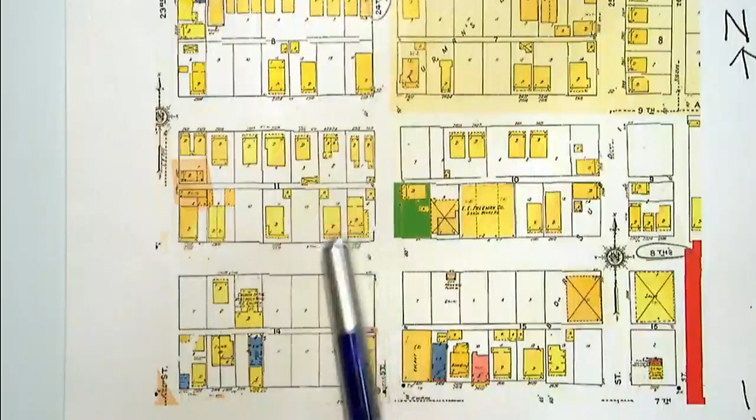Currently on site, through urban renewal and other challenges, structures have been removed. So currently to the east, you have empty parcels. Then you come to a grouping of contributing structures that I'll show you photos of. And as you head west across 24th, you have two historic structures there that we'll use for reference for setbacks and elevation from grade.

This is an aerial view so you get an understanding of the lay of the land as well. Once again, 8th Avenue, 24th Street, does have the alley that runs east-west behind it.

There are no trees in question. You see a canopy here, but Natural Resources has already reviewed this site and they have no concerns of the site plan as presented.

8th Avenue in the background, 24th Street here, looking back into the property. As I turn around on 24th, you have this period contributing structure that has a wraparound porch.

Now looking at the site from 8th Avenue, this is looking to the north. This is the subject site, 24th Street.

As you turn around, this is new construction that was reviewed and approved by this board, but has a different zoning classification. This allows for more of an industrial flavor, where the zoning classification that is in front of you today is a YC2, which is more of a traditional single-family structure.

As you work your way down 8th Avenue to the east, this is an abutting empty parcel.

This is looking down 24th to the north. Subject site is here.

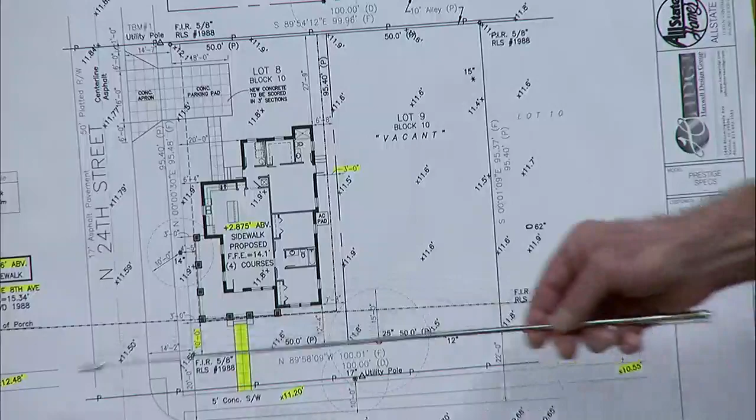It is 2.89 feet above the elevation of the sidewalk. On the other side, that sidewalk is at 12.48. Elevation is setting at 15.34, so we're 2.86 difference. We are exactly in the middle as far as the average. Sidewalk, finished floor elevation, we're 2.875 above that, so we're exactly on it.

Showing the setback, this is the front porch of the house to the east, front porch of the house to the west, showing the line. Our front porch lines up exactly, and we're, believe it or not, exactly 10 feet, which meets the setback. So it lines up great.

As far as our side setback, we're at 3 feet. We're honoring that. We're showing here the scored sidewalk from the existing sidewalk, same in the rear. We have all that. I think that pretty well covers the site plan.

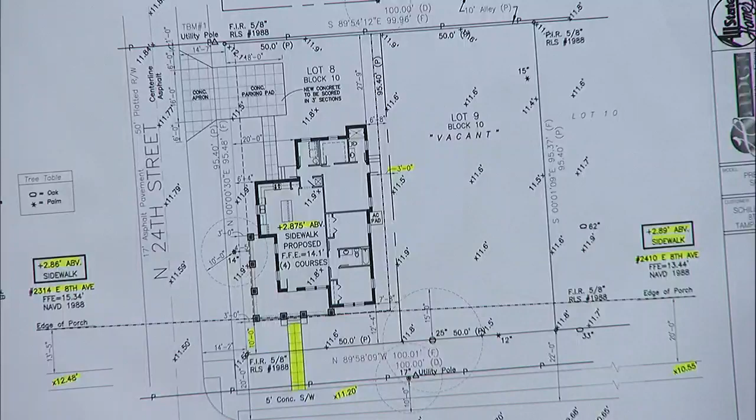Do you want to show this diagram?

May I hold on to it? I can't see it. You can speak from over here. We can see it on our monitors, so please. See it? We can see the diagram on our monitors.

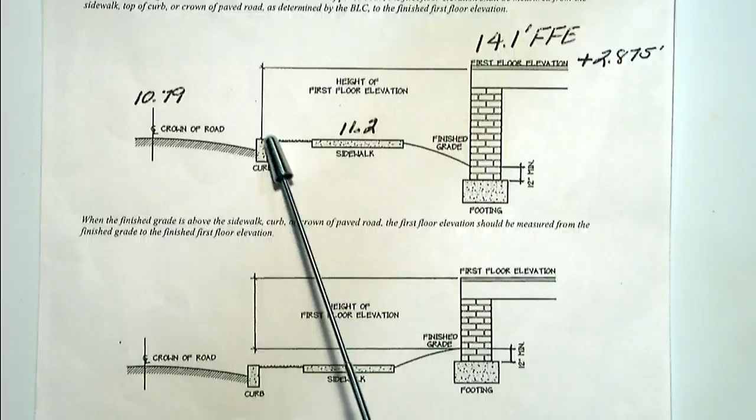Okay, all right, well, you're seeing the crown of the road, and I kind of covered these points a while ago, talking about the sidewalk, but crown of the road, sidewalk in front of our structure, proposed FFE, and then the difference, the 2.875 that I mentioned a few minutes ago.

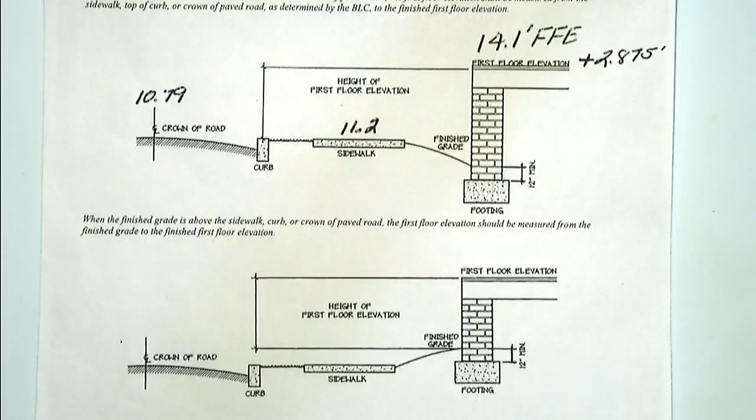So we want to talk about the house that we used as our inspiration. This is 9th and 24th on the corner. It's going to be the block north. You can see that it's stucco construction, with 3 risers as far as the elevation off the ground, gable venting. So we use that as our pattern. This is a closer look at the pattern of the stucco, and I zoomed in even closer to where you can see that pattern. Our proposed pattern is almost identical.

On the conditions, there is a point asked about fencing. There will be no fencing at this time. I showed earlier the scoring of the concrete to reflect the historic pattern, and I think I'll cover the window trim and that material when we look at our wall section.

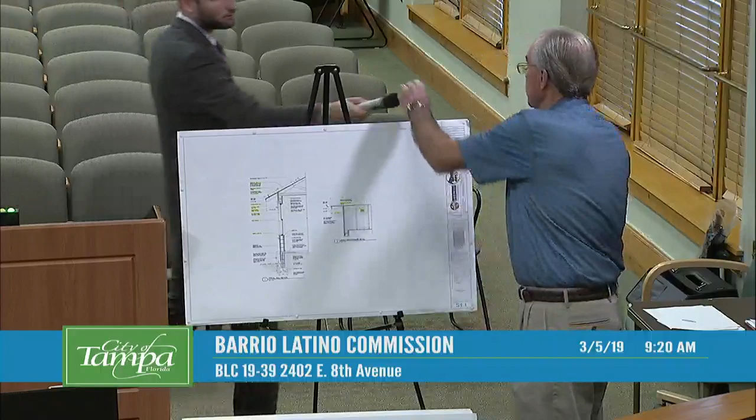We're going to have a 30-year dimensional shingle. And as far as the exposed rafter tails...

Hang on for a second, please. We're going to ask that we can see on our monitors what you're showing there, because we can see it up there, but we'd like to get a little more detail in the monitors. We see the stucco pattern still from the Elmo. It's just a camera. Does that fix it? Oh, okay. That explains it. Sorry, please continue.

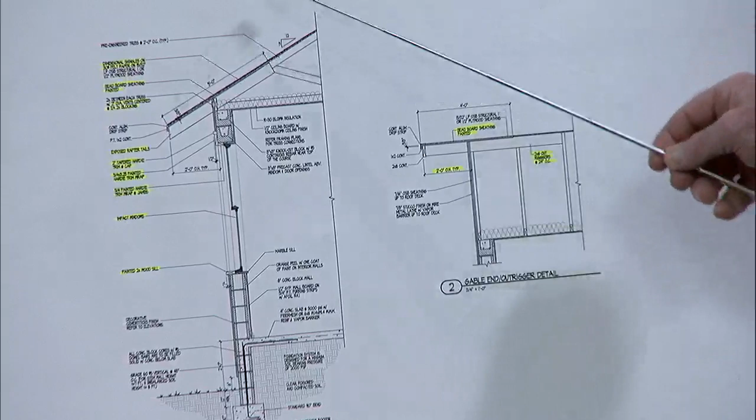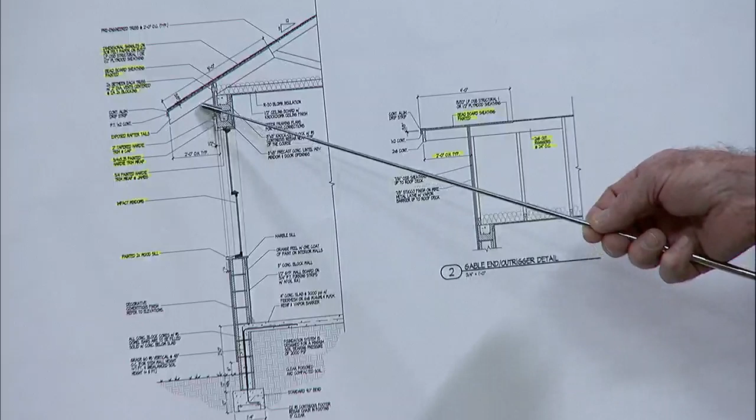I was talking about the trusses and the open tails. We're using a manufactured truss, and we're transitioning to a 2x6 here. We are using beadboard underneath the overhang, and that beadboard will not just be on the overhang itself, but on the porch as well, so all of the underneath will be that. Again, the rafter tails.

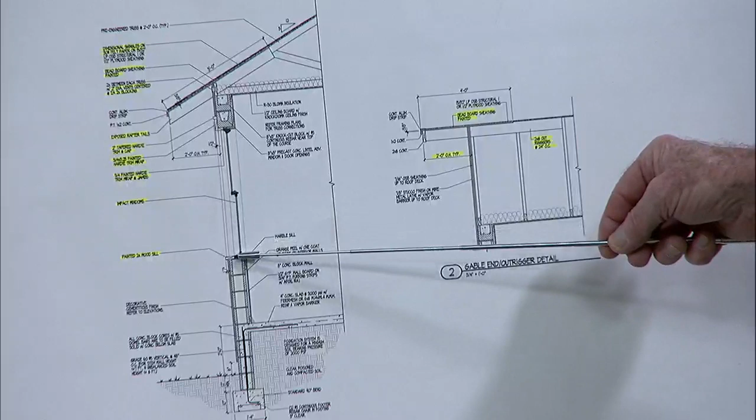Now, the windows - there was some note about fabric shutters in the comments. There will be none of that. We have hurricane-rated impact windows. We're proposing to set that window mid-block and trim it out with 5/4 Hardie, so the inset would be trimmed and then cased around the side of it, the top trimmed as well. We've also got a wood sill on the bottom.

On the gable end, as on the side, we have a 24-inch overhang. Again, we have the beadboard sheathing and a 2x6 outrigger. So I think it all ties in really nice.

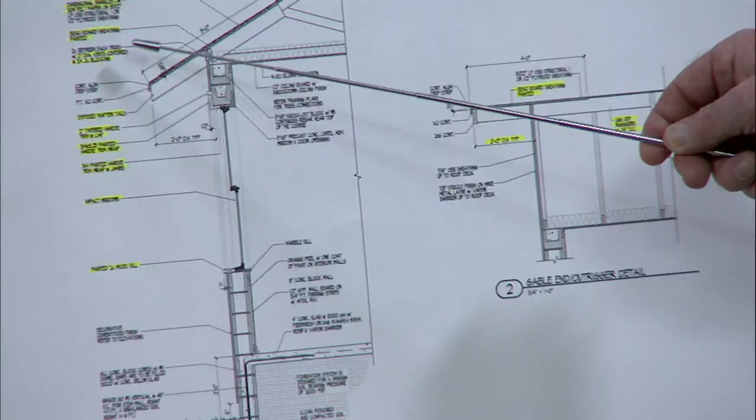One of the things I didn't point out that I really think is nice is between each rafter or each truss tail will be 2x6, what we refer to as bird blocking, an old term. We'll have a 2-inch diameter vent drilled into each one of them, so it'll give it adequate ventilation.

Now we're going to have gable venting on the house, but for functionality, we will have ridge venting to get the proper draw and function.

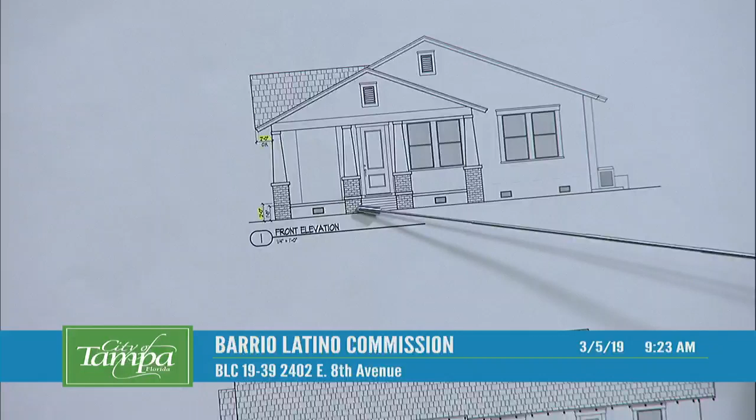Front elevation, we're showing the 2-foot overhang. We're 24 inches from grade, that would be 3 risers. We have the brick trim on the columns.

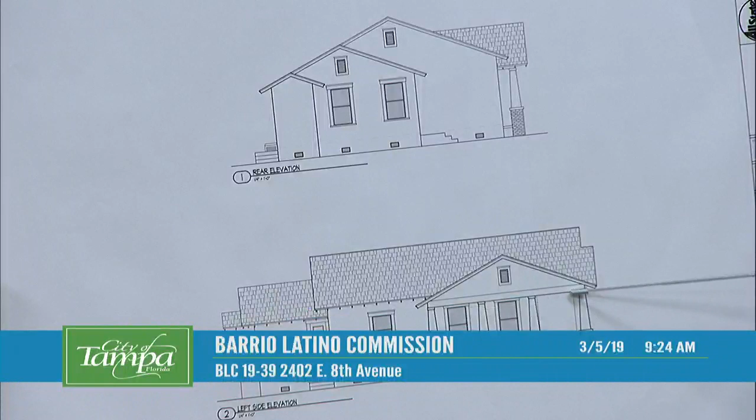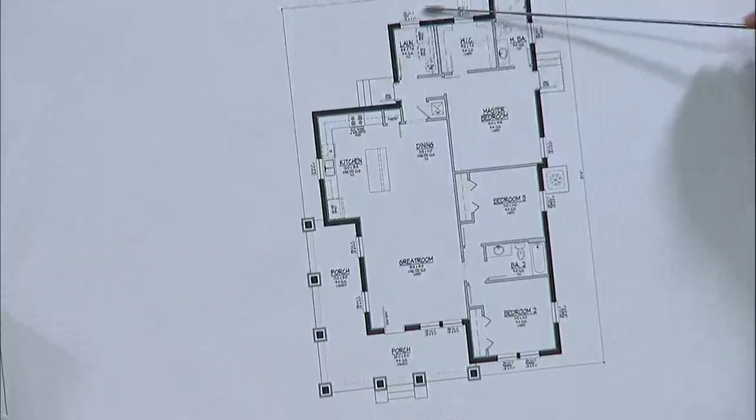This shows the wraparound porch. So we're inset here, come along here. We have a second inset, so it all breaks up as it comes down the side. This may show a little bit better, and we're coming across, breaking - so there's no straight lines involved on the sides.

This would be looking at it from the corner of 8th and 24th. So 8th being here, 24th, so you're getting a view of what that porch looks like. Again, you see how it steps back and steps back again.

What I'm showing here will be a vent that we'll have on the foundation. It is a stem wall foundation, but for appearances, we're going to make the look, the historic look with that vent.

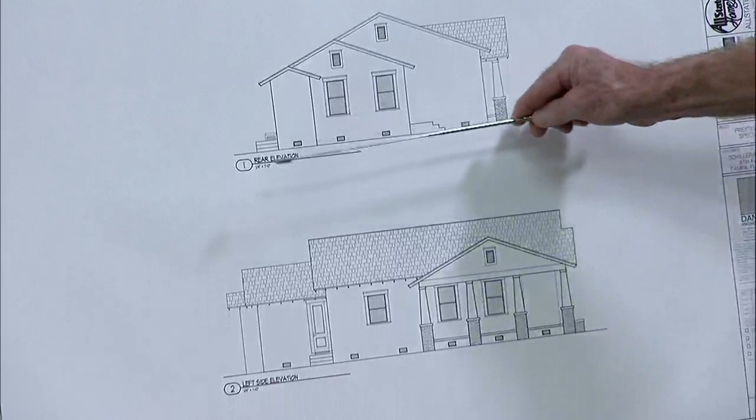This would be the view coming south on 24th. All right, and then there's parking in front of that, right? That's where the driveway will be for the house? Parking would be right here. And then the mechanical unit is going to be located where on the property?

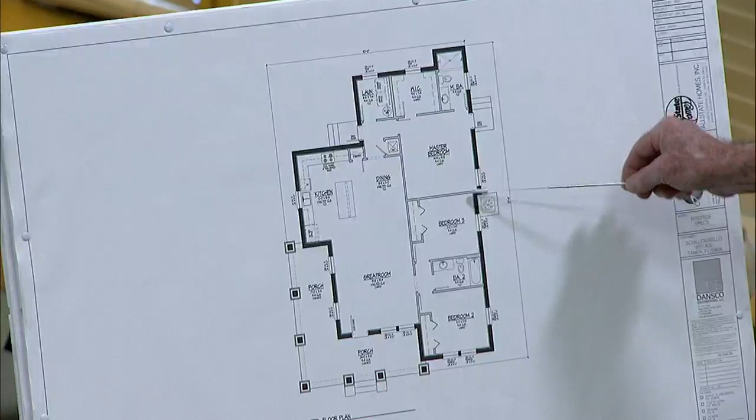This would be on the east side, and there's a little jog in it - it'll tuck right there. We're still 3 feet off of the property line here. Great, I don't think I have any further questions.

Good morning. May I take a look at one of your sections, please? Wall section? Yeah, your wall sections. Okay, so I have a question on your foundation. So you're just looking at that from here - it looks like you're doing fill all the way up to the underside of a porous slab. Is that the intention? Yes, that's the intention. Okay, all right.

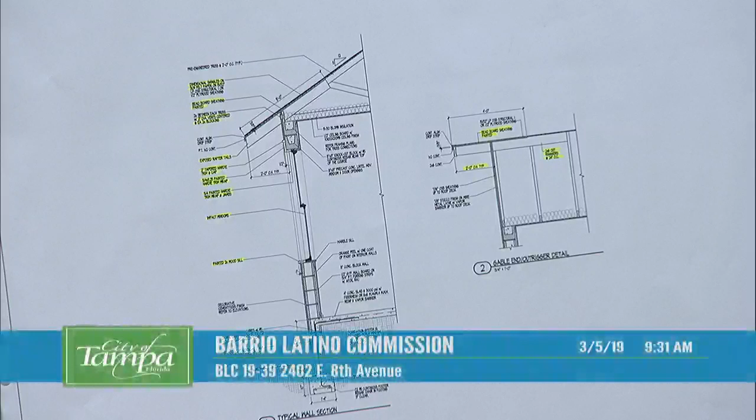And then there's that other section to the right of the wall. Are you proposing a true gable end vent, or is it just going to be a faux element that's not operational? It's not operational. Okay, would you be able to see an actual opening, or would it just be boarded up on the backside? How's that going to be presented? Because it looked like on your renderings you were showing something there, but I don't know if the intention is you're just going to drill or fasten a louver. The intent was to fasten it, but we framed it out with the 5/4 just like the windows. So the frame-out is intentionally just like the window, but it was just going to be for the historic look - it was not going to be functional.

Okay, and then I guess there's no railings at all on that front part, right? There's not, but we're less than 30 inches, so it's not a code requirement. If we had been 30 inches or greater, yes.

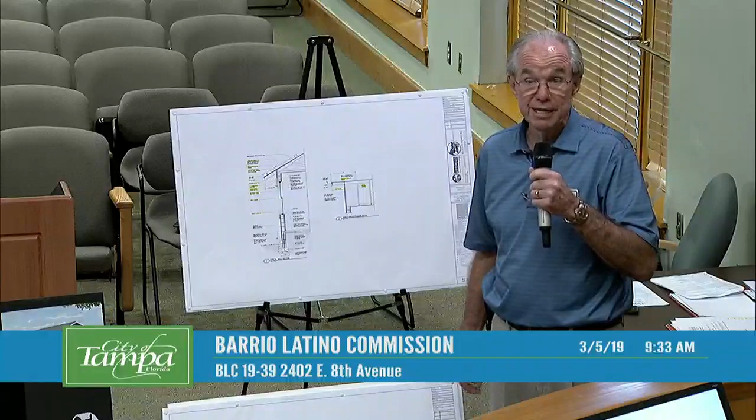Is there going to be any fencing proposed around the mechanical unit, since that will still be visible from the street? We haven't necessarily proposed fencing, but the plan would be to cover it in some way, whether with a fence or with shrubbery and landscaping. But should be - yes, we just haven't got it on the plan.

Okay, and then just for my own knowledge, if I can take a look at your elevations, I just want to see what's happening more so on the north side and then the west facing side. Yeah.

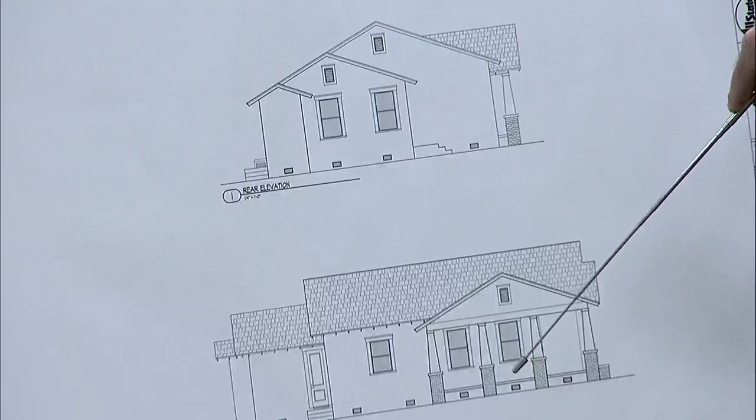Okay, this is going to be looking from the north, the rear of the house. And then this is what you would see from the corner of 8th and 24th, showing the porch.

So we're basically having stucco all the way from the underside of the roof down to grade. Is that what you're presenting? Correct. All right, okay, I have no further questions. Thanks.

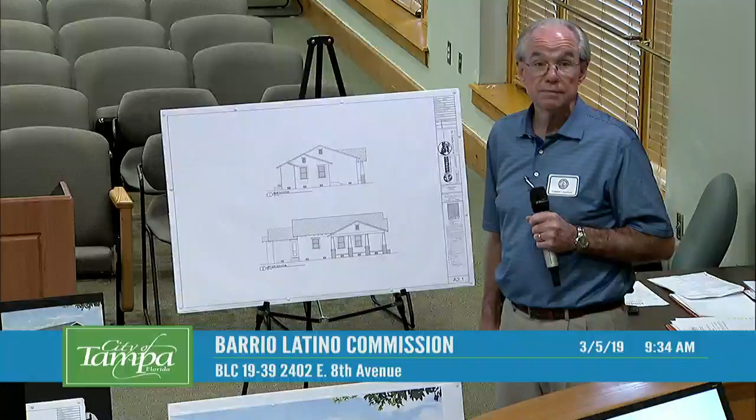Two questions for you. While you have the elevation up, you just clarified for us that you're using fill up to the slab, yet your elevations are showing those decorative vents. Yes, so those are just purely decorative, they're not functional. Not sure if they're necessary, but we can leave that for discussion.

Second question is in regards to your site plan. You show a stoop off of what appears to be the master bedroom on the east side. What is the material, and are you allowed to do a stoop like that within the 3-foot setback? We're not in the setback. Oh, you're not in the setback? Okay. What is the material of that? Masonry. Okay, all right, thank you.

Thanks for your presentation this morning. I want to go talk about the window selection that you have. You said that would be trimmed out with the Hardie board to the side, on the jambs of it. Is that a 1x6 or like a 5-inch profile that we would have around the windows? The elevation shows 5/4 by 6. So the inset of the window will have the same 5/4, and then the face of it as well, 6-inch.

Okay, so we'll have the rafters and the surround for the window at approximately the same scale. The rafters, yes, are 2x6s, the rafter tail, correct. And those are all depicted correctly in your elevations? It's hard to see from here, but a 2x6 on the rafter is pretty substantial, and the elevations for such a small house, square footage wise, don't seem to accurately depict the 2x6.

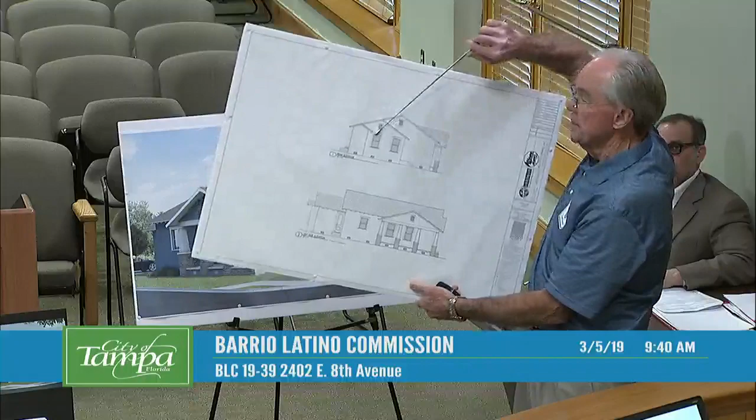So if I'm understanding, lose some? Yeah, like those lower ones. You could get rid of three of them and still be fine. Probably get rid of that one. This one, this one is at the same elevation - those are appropriate in terms of where they would be.

Now, we've already talked about the fact that they don't do anything, so do you want them or not? And you've already acknowledged that you have the more interesting detail of the bird holes that are for the soffit vent - that's a more interesting architectural detail that you're actually doing something with. So it's up to you on whether or not you want to include those.

From a curbside appeal standpoint, the venting you're showing is nice and breaks up the mass, but there's too much of it around the house, both in the roof line and the foundation. It would just be inappropriate.

So if I'm understanding, maybe lose this one and both of the ones on the back? I think it's up for discussion - this is just my take on what you've presented, and it's not official or final, it's for discussion. But the point is that by trying to introduce things that mimic things from the past, they sometimes get out of place, and in my opinion there's too many of them, so the whole notion of the reference and the functionality is lost, or at least muddied.

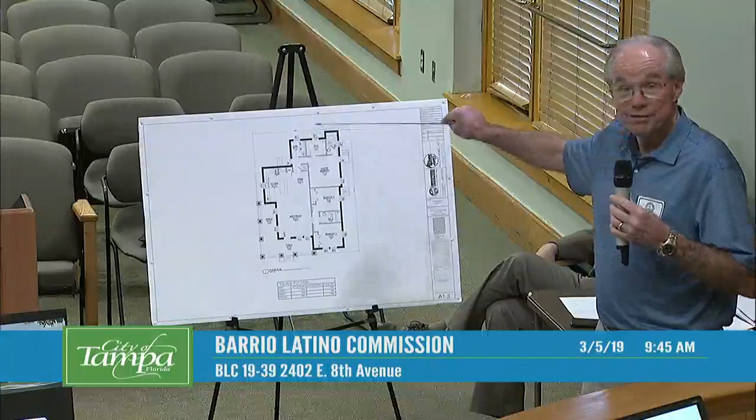This part, if it is important to do that, it is. This is going to add some square footage, a little bit of cost, and even though you're correct that it's expensive to make these jogs, the net will be more expensive picking that up. We've tried to work historically and from a budget perspective, so if I don't have to expand both of those, I would like not to, but if I must, I must.

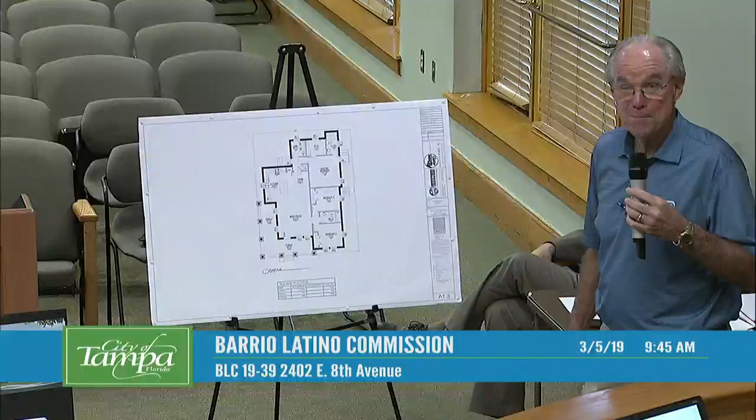Thank you. So we will close the public hearing, and commissioners will discuss the case and figure out how to move it forward.

Now that we're discussing, I would agree with the discussion on the vents—it is a bit much. Definitely remove the ones on the porch, and I believe we could reduce the ones on the gable. Whether they want to remove the ones around the rest of the house where the crawl space would be is up to their discretion, I think. Other than that, I do agree there are some odd juts in the building, but because of budget considerations and the program for this to be a private residence, I think it's up to their discretion as well.

I think you kind of hit on something on the floor plan side, something I thought about earlier when looking at this case. There's a little bit of complexity we're dealing with here. I think the applicant did make some strides to have historical references, but I do agree a reduction of the gable vents would be great. I personally think if we just remove them at the porch area and keep the top one, and also from the south facing and north facing, we'll achieve that historic look. I think I was hearing a little bit of cost issues with the floor plan.

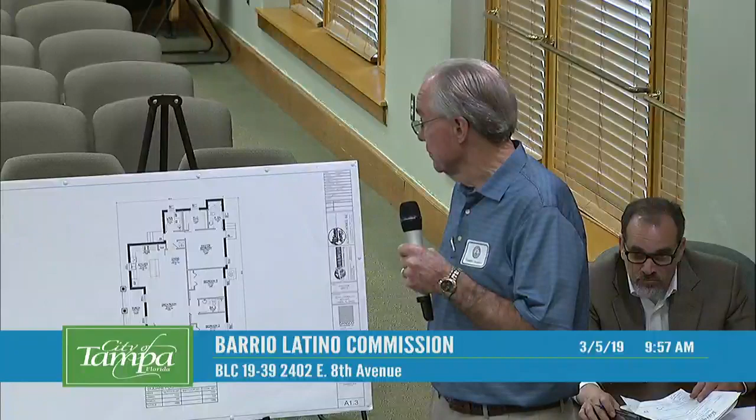I think so. I mean, there's been a lot of conversation about both foundation and gable venting, obviously easy, whatever we need to do. I'm not clear here, but I'm sure we can work it out with staff if it's agreeable with everybody.

Can you put the elevation up for that facade so we can discuss a little bit? Do I need to open the public hearing for this, or is he being responsive to our questions?

Yes, I think you should have a motion to reopen the public hearing. Okay, motion to reopen the public hearing? Second. All in favor? Aye. Okay, we're open.

So on the north facade, you've got a number of different things happening there. We've got some blank walls. We've got the shower portion that's projecting out, and there's what's happening on that back wall. I think that can be solved with perhaps some further articulation, removing some of the venting that we were talking about, and acknowledging some of the other openings that might go in there.

At the shower, you might have a light, as well as on the other portion of that building to the right. It's a kitchen. That's the kitchen - you've got a kitchen right inside there with wall cabinets. That's why there's not a window.

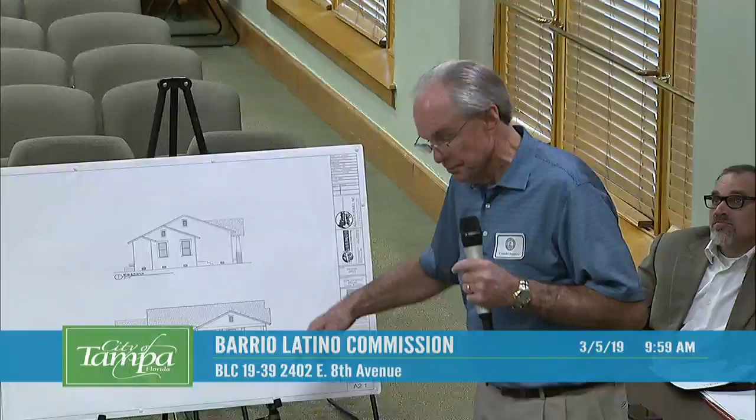So we're on the other elevation, we're seeing the window at the sink. Here's your window over your sink. This wall right here is the wall that you're not seeing a window on. Right, we have cabinetry running.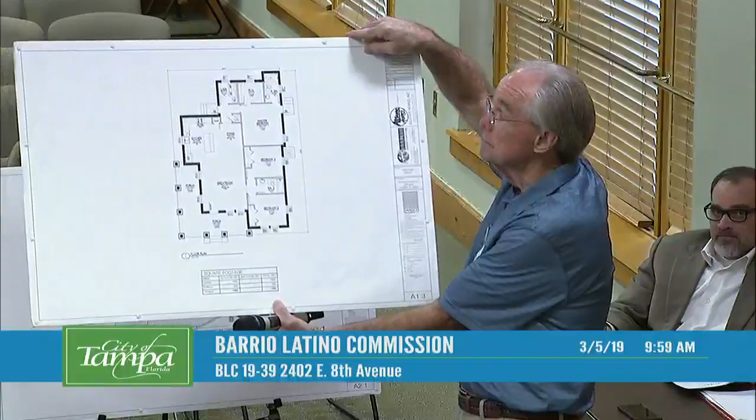Okay, and then we have that door that's coming out of that facade.

Well, I think you've understood what our concerns are on those, and I think we can let you work with staff on those particular facades to iron it out by getting some of the venting removed and articulating that back facade a little bit differently.

Okay, so we will close. The only thing I'll add here is I know we have the agent and designer of this project, but we also have the owner, Mr. Evan Schiller, who we want to hear from, whether he's open to the conditions, making sure we have the proper person authorized to be good with the conditions.

Yes, I'm open to the approval board conditions. Thank you. Okay, so we will close the public hearing for commissioners, and I think we can entertain a motion.

Just a quick discussion before the motion, in terms of what I suggested about detailing the base of the building with a score, is that proper, is that something staff can do? I think we'll leave it as an option. The other thing I'd like to add to the list is for the brick, just making sure staff is clear as to what is going to be used for the brick on this project.